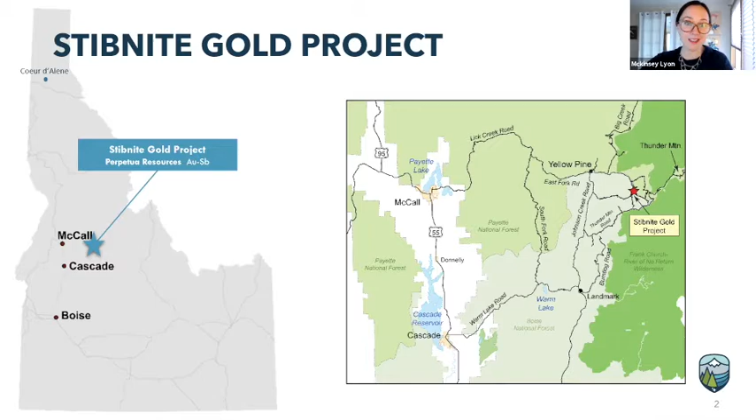As we start the conversation today, it's important to also get a good sense of what Stibnite is today. This historical Stibnite mining district first saw mining activity back in 1899, right around the Thunder Mountain Gold Rush. Predominantly at that time, they were looking for gold and silver. But the majority of the mining at Stibnite actually occurred during World War II and just past the Korean War.

This is because at Stibnite they identified a really important source of both tungsten and antimony, and these were considered critical for the US war effort. So again, most of the mining happened long before there were environmental regulations on how to mine or how to leave the area when they were done. As a result, there are many legacies that have been left behind.

For example, today the East Fork, South Fork of the Salmon River flows into the abandoned Yellow Pine mining pit. As a result, this has also blocked Chinook, steelhead, and bull trout from migrating into the upper headwaters of the East Fork and Meadow Creek in order to reach spawning grounds for over 80 years.

We also have over 10.5 million tons of unlined tailings and spent ore that currently pose a risk to degrading water quality, both with arsenic and antimony. And then overall, we just have degraded habitat conditions, both from sources of sedimentation, past forest fires, etc. So this is an area that needs help.

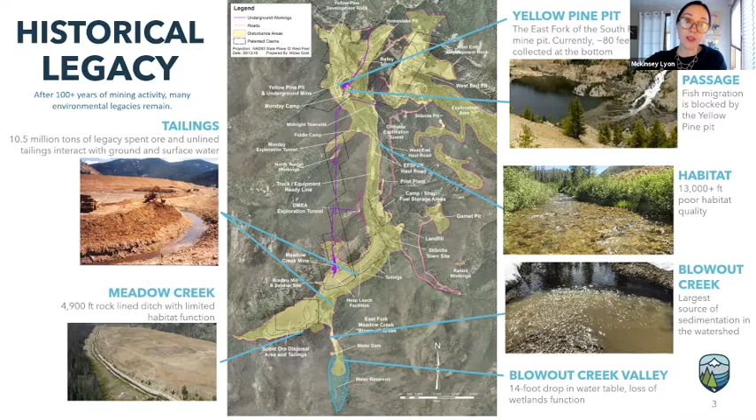However, between 2002 and 2012, the former operators and the former governmental entities involved signed a series of consent decrees. And these decrees allowed these parties to walk away from any future responsibility over the environmental conditions that have been left behind here at Stibnite.

So knowing this about Stibnite, we knew that if responsible modern mineral development was going to happen here, it had to bring along environmental solutions. That's why we've designed this project to repair the legacies of the past, to leave Stibnite better than it is today, and in doing so, also produce the minerals and metals that we need for our country, both gold and the critical mineral antimony.

So we spent 6 years gathering data, listening to our communities, and putting together a plan for the Stibnite Gold Project that we call the Plan of Restoration and Operations. That was then delivered to the U.S. Forest Service over 4 years ago, which initiated regulatory review of the project under the National Environmental Policy Act, or NEPA. This regulatory review includes a whole number of local, state, and federal agencies.

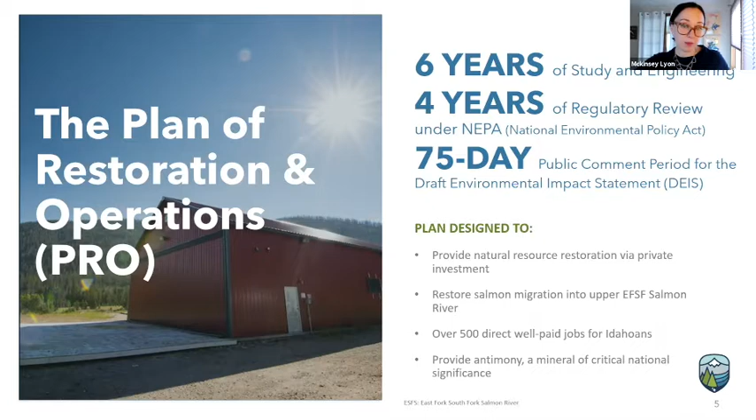It also recently included a 75-day public comment period on the draft environmental impact statement. Now, some of the things that this draft environmental impact statement concluded supported our approach with the project.

By looking to restore the legacy aspects of the site through modern mining, we could increase stream functional units and wetland functional units. We could help support fish populations by providing more access to critical habitat. We can improve water quality, and overall help restore components of the site.

But it's also important to note that the draft EIS is a draft for a reason. It's intended through the NEPA process to help the public get eyes on a proposal and provide comments and feedback. Through that 75-day comment period, there were just over or under 10,000 comments received. While the majority were supportive of the concept and the project, there were still some we wanted to pay close attention to because they brought forward concepts and ideas that can make the project better. Through that process, reading the draft EIS and the comments, we've identified opportunities to improve water quality, reduce stream temperature, and overall reduce the footprint of the project.

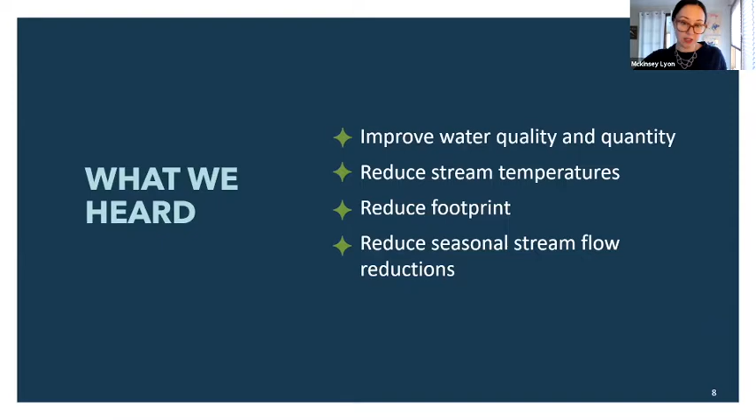So, for example, we've now proposed to the U.S. Forest Service, in response to comments on the draft, an overall 10% reduction in total volume of mined material, that we would reduce the size of the Hangar Flats pit by 70% and fully backfill it, and we would also eliminate the need for what we call the Fiddle waste rock area. By doing this, we also see a substantial reduction in our overall footprint for the mine.

Some of the added benefits these elements bring are improved water quality, overall reduced water temperature back to levels more closely aligned with baseline, and a reduced footprint, which were all goals we went into. Ultimately, this is how the NEPA process is designed to work, to take in feedback and continually be iterative, to ensure that by the time we get to the final environmental impact statement, we have a project that has truly been refined and is the best for Idaho.

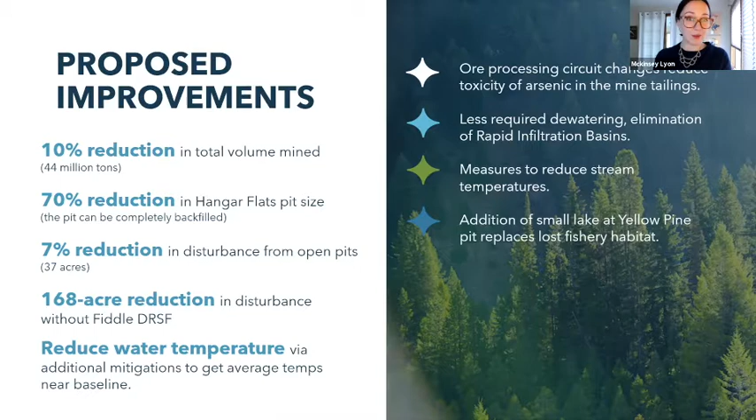So with that overview on where we are, I want to turn it over to Rob to talk about some of the conditions of the site today and how we've approached the project design.

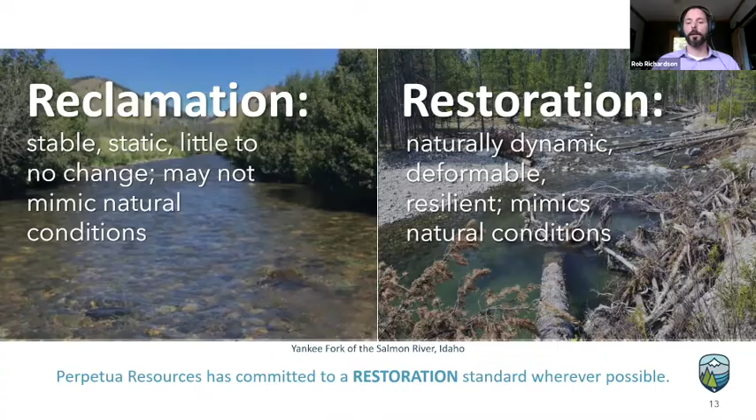That reference site data can then be used to develop empirical formulae that help fill in gaps between some of the data points, and we use published design guidelines, of which there are many. Those three things combined provide multiple lines of evidence for us to develop the physical design criteria for the project—essentially making sure the stream will function physically by transporting sediment, water, and nutrients, and not excessively eroding its banks or bed or filling in with sediment. But of course, we have aquatic organisms as well.

Within the constraints of what's physically appropriate, we also try to optimize the stream for biological conditions. We've worked with fisheries biologists to understand preferred habitat conditions for sensitive and keystone species such as Chinook salmon, steelhead, bull trout, and cutthroat trout. We've incorporated, to the extent geomorphically appropriate or feasible, those biological criteria into the physical design, refining it to best provide conditions that will improve habitat for those sensitive species and life stages.

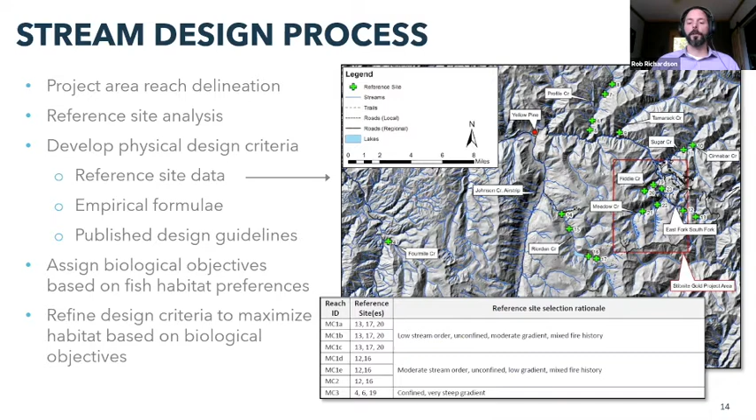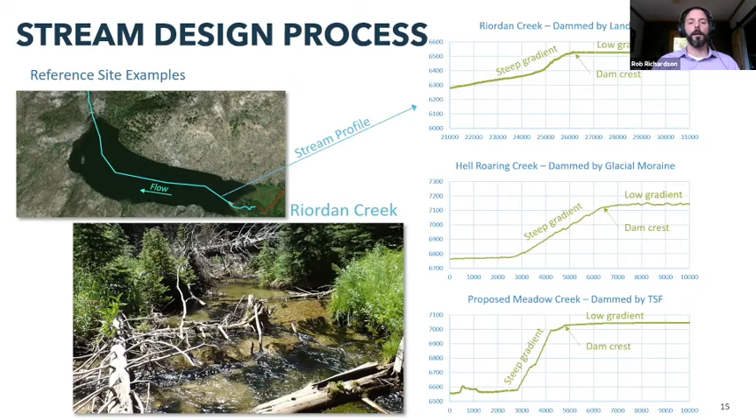That's similar to what's proposed at the tailings facility for the Stibnite project—a dam with a low gradient reach upstream and a steep gradient down the face. So we were able to collect valuable data in both the low gradient and steep gradient segments of this reference reach.

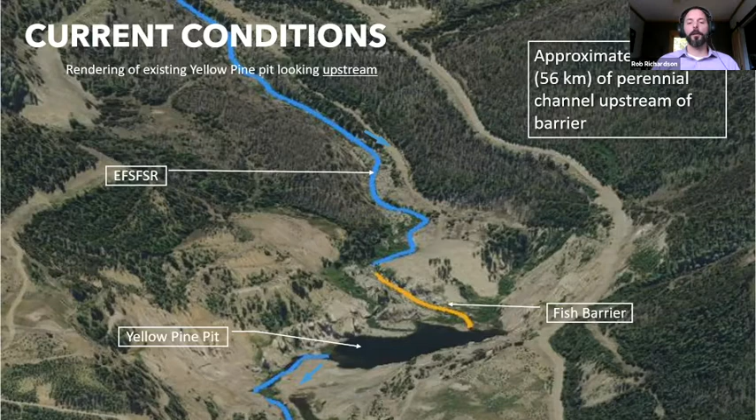One of the other key features to be restored is fish passage at the Yellow Pine Pit, as Mackenzie mentioned. This is an oblique aerial looking upstream, showing the east fork of the south fork of the Salmon—I'll just refer to it as the east fork—flowing toward us, then down a cascade into the existing Yellow Pine Pit and on downstream. That barrier currently blocks about 35 miles, or 56 kilometers, of perennial stream upstream of that point. There are different fish access attributes that Eileen will touch on as the next presenter, but I wanted to point out how much perennial stream is blocked by that current barrier.

After mining is complete, approximately 10 years later, the Yellow Pine Pit would be backfilled and the stream restored back over the top with natural passage up and down, and the mine tunnel would be abandoned.

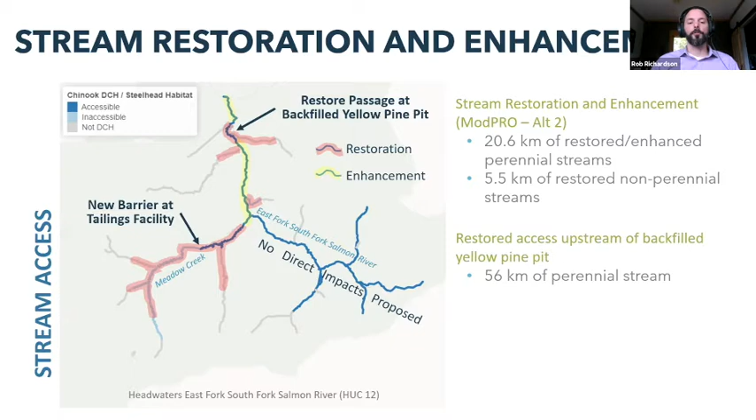Next—that area of the Upper East Fork looks like this.

There's a portion that had been burned in the past, and some of those trees are now starting to fall in and provide a lot of cover and structure for the channel, sorting gravels, creating pools, generally pretty good habitat.

Likewise, you go upstream just a little bit further and you get into a spruce fir dominated forest with a number of floodplain wetlands. You have a nice sinuous channel with vertical to undercut banks, gravel bed, pools, large wood. Again, also generally pretty good habitat.

So there's a combination of existing high quality habitat and proposed enhanced and restored habitat upstream of the existing Yellow Pine Pit.

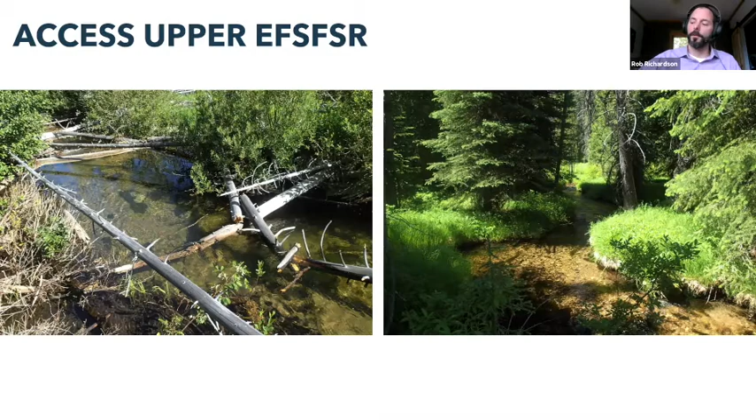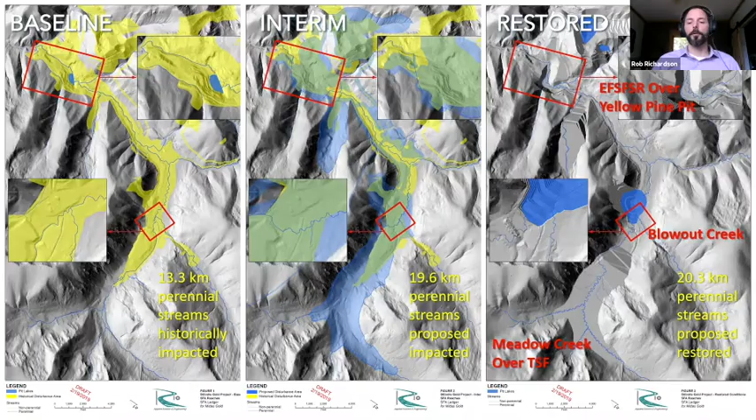So when the Yellow Pine Pit is further mined, that will then be backfilled. That's what's shown here in orange, the backfill of the Yellow Pine Pit, as you can see on the right. Additionally, we're going to create a new floodplain.

You can see that floodplain's on the order of 200 to 500 feet wide or greater in some places, shown in green, and the East Fork restored through the middle of that.

Now, the floodplain, we worked with the Stibnite mine plan team to create a sinuous floodplain, that S shape, rather than a straight line. If it were straight, the stream gradient would end up around 6.5%. By creating the sinuous floodplain, we can get a stream gradient on the order of 4.5%, which is a little easier for those fish to move upstream through.

Likewise, those two curves in the floodplain coincide with Midnight Creek coming in from the right, shown as MNC, and Hennessy Creek coming in from the left, or HC. Those two streams are both perennial cold water streams, but they're relatively small and currently don't have any fish use or fish access.

But by allowing those streams to flow down along the downstream margin of each of those bends in the floodplain, we can create what's called a wall-based channel, where flood flows from the East Fork, as depicted by those light blue dashed lines, would periodically add flow and volume to those small tributaries, scouring pools, moving sediment, and creating habitat.

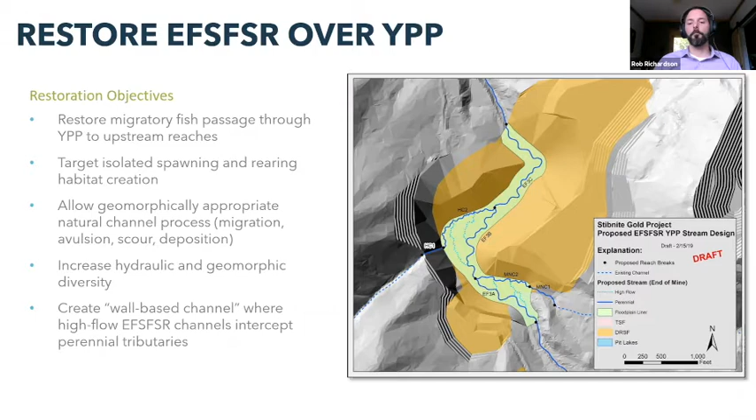Okay, next. Another example is the Meadow Creek over the tailings facility.

You can see there's a proposed dam, upstream of which, or to the left of, would be tailings, and downstream a large development rock buttress to help stabilize that dam.

And as I mentioned earlier with the reference site at Riordan Creek, you would have a very low gradient system on top of that facility with a steep drop off down the side. That would represent a barrier, but there would be an isolated population of fish upstream and enhanced and restored habitat downstream.

Now, unique to this site, as well as the restoration over Yellow Pine Pit, is that the stream and floodplain would be lined. So there would be an effort to separate the potential groundwater interchange from the stream groundwater and what lies below, in this case, the tailings facility.

But the stream liner isn't just beneath the stream, it's buried at depth beneath the entire floodplain. So here we've got about a 12-foot wide stream and about 150 to 200-foot wide floodplain, ample room for the stream to migrate around laterally and vertically, because the stream liner would be buried below the maximum anticipated scour depth and across the full width of the floodplain.

So as part of our natural channel design, the stream would be able to migrate and meander and scour pools and evolve just like a natural stream would. Additionally, we've provided, as you can see at the upstream extent, some accommodation space for alluvial fans to develop, which we would anticipate in that transition from a steep to low gradient area.

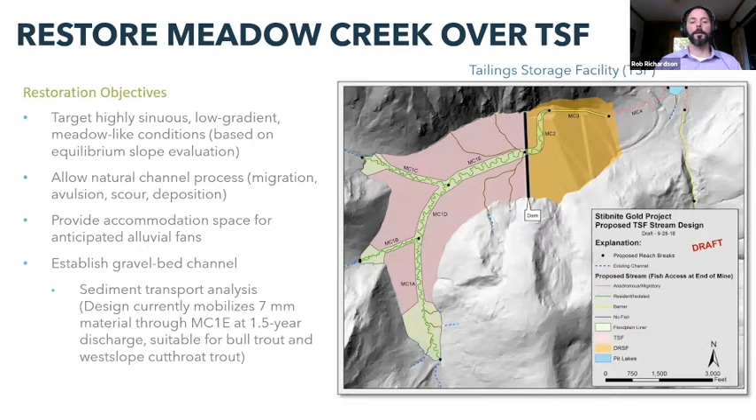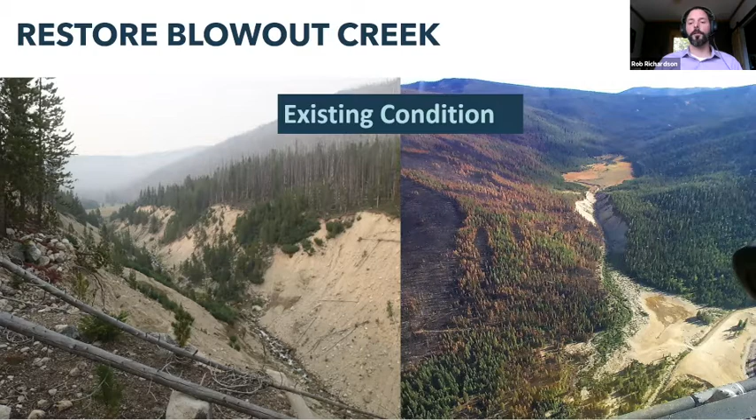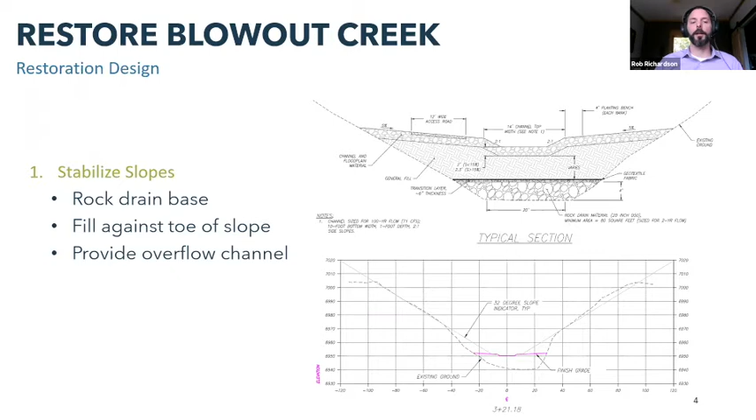There's really not fish passage up this area right now, so fish passage is not a big concern. It's a relatively steep gradient area, up to 17% gradient. So that's the fix for the sediment problem.

Upstream, that destabilization has resulted in an incision and head cut that's dried out the meadow in this area. About 16 feet of incision have occurred. We're proposing a structure near the downstream end of that meadow that would provide grade control and function similar to a large beaver dam, backing water up into that area, allowing it to slowly fill again with sediment, but also reestablishing the groundwater levels that would provide the hydrology for the wetland.

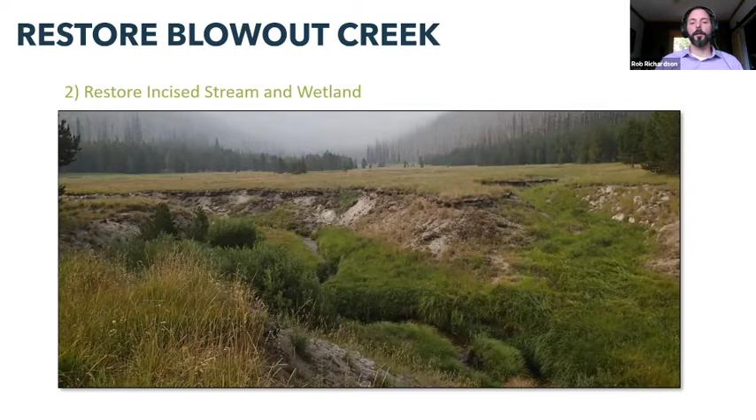So how are we going to evaluate our goal, our objective of trying to restore these streams to a condition better than what they are today? We're doing that through a stream functional assessment.

The functional assessment we've developed is based on the U.S. Forest Service watershed conditions indicators, which are listed here. Each of these indicators has been evaluated at a number of sites throughout the project area to determine what the existing or baseline condition is. Then we estimate the future condition for each of these based on models, based on our stream design, based on proposed impacts from the project, and calculate what those would be for each of the reaches that are part of the project, for each year of the mine.

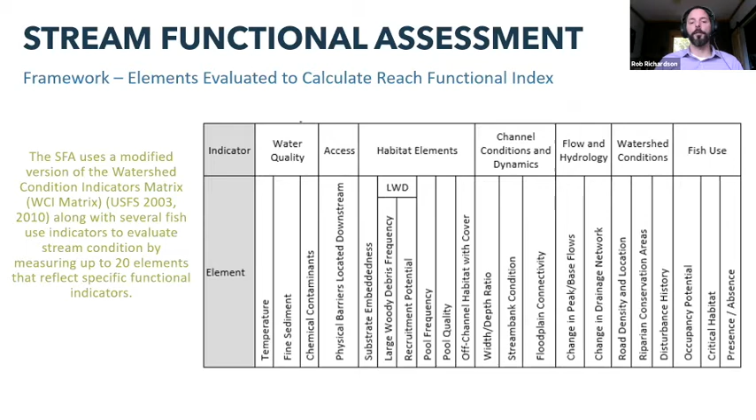We tabulate all of those data in this stream functional assessment following this simple equation. Essentially, all of those watershed condition indicator elements are tabulated and normalized as a percentage, so we have a percent functional index, the quality, and that's multiplied by the quantity.

My 6-year-old. So then, Olive, I'm giving a presentation, honey. Bye.

The length of the stream and the stream order is therefore provided as the quantity. So we have quality and quantity that are multiplied together to create what we call a functional unit. Those functional units are tabulated for each of the stream reaches, and all of those are then added together to provide the next slide.

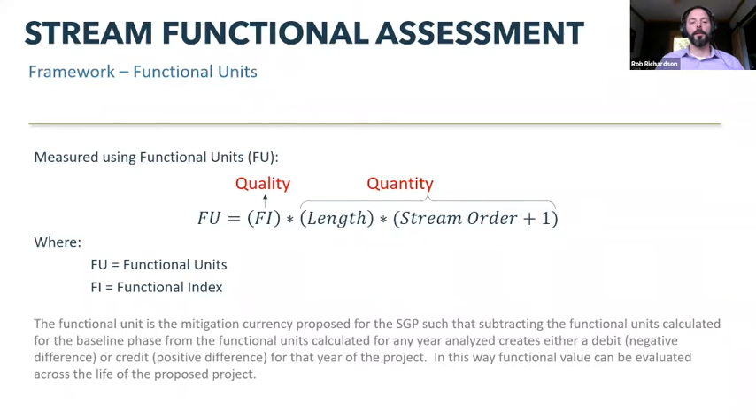What you can see is the outcome. We do this for every reach and every year of the proposed mine life. The years are along the bottom. The baseline condition is shown as the dashed line at 0 across the middle of the graph. All of the impacts are shown in orange, accumulating a deficit, and all of the proposed restoration or mitigation efforts are shown in green. The net difference is the blue line in the middle.

So you can see there are a number of early impacts and early restoration efforts, including passage at Yellow Pine Pit, restoration of Blowout Creek, enhancements at the East Fork, but they don't fully overcome the impacts initially. Over time, more and more restoration efforts start to offset the impacts and ultimately result in a surplus, which is our validation that the restoration effort is offsetting and resulting in a condition better than where we started.

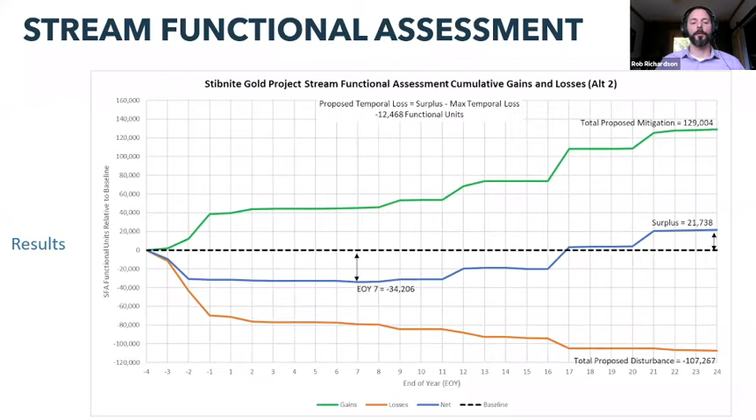And all of that, of course, is to help provide habitat for fish, which is the next part of the presentation.

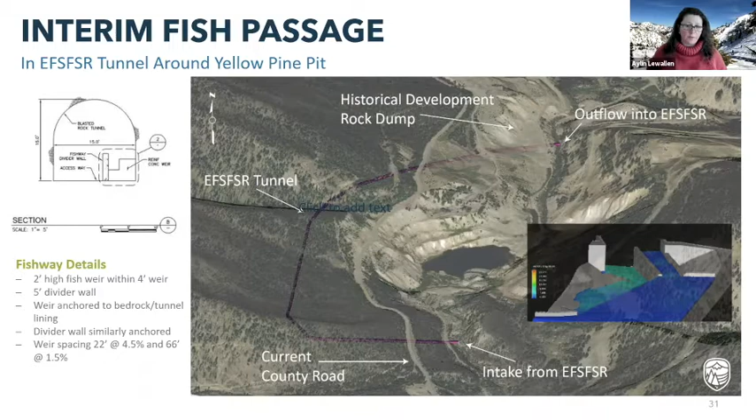So the first thing I wanted to talk about is accessibility and how that relates to designated critical habitat for both Chinook salmon and bull trout. It's also beneficial to make the point that this is all applicable to steelhead as well.

Critical habitat was not mapped above the YPP as designated critical habitat, but the habitat is suitable for steelhead. So this applies to all three of those species, as well as cutthroat trout. Currently, designated critical habitat upstream of the YPP is inaccessible — the fish species cannot go above the lake shown here in this picture.

The DEIS did not take into account the change in accessibility of this critical habitat above the YPP in the East Fork, Meadow Creek, and other tributaries in the watersheds above the YPP. When the East Fork Tunnel Fishway is operational at what's called the end of year negative-1, designated critical habitat for both Chinook salmon and bull trout will become accessible to these species, and similar improvements will occur for steelhead as well.

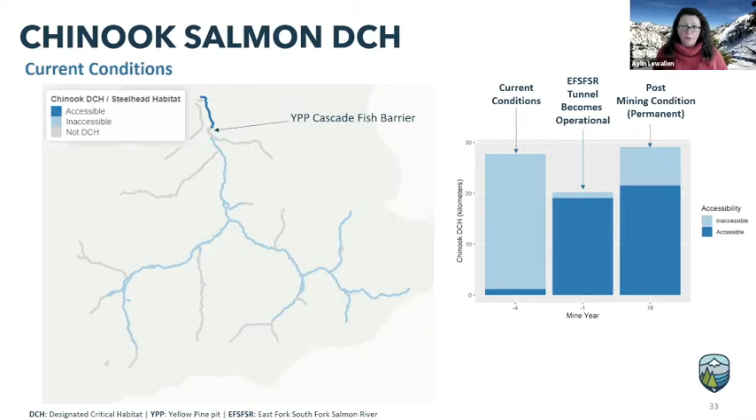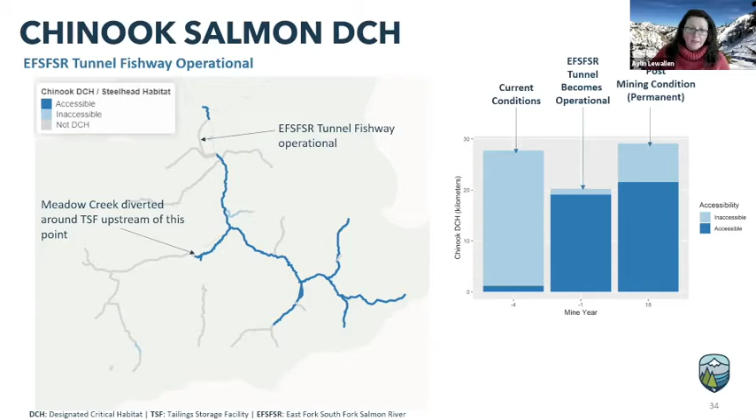The graph to the right shows the dark blue as accessible habitat over time, which increases over the mine years and is again approximately 94% greater during the post-mining condition, or the new permanent condition, compared to existing conditions today.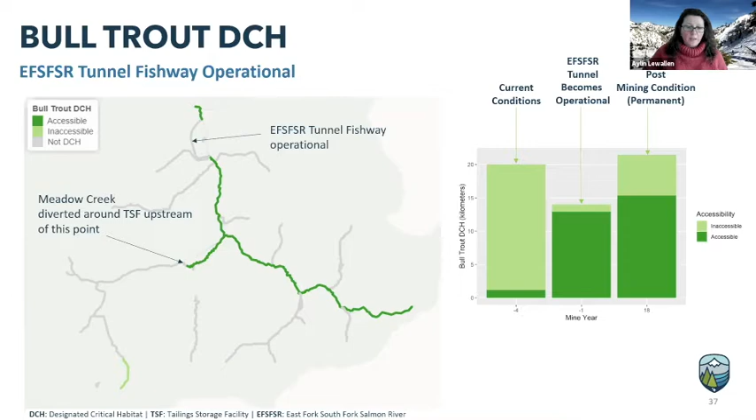Then in post-mining conditions, similar to designated critical habitat for Chinook, a more accessible habitat becomes the new normal under post-mining conditions as compared to current conditions. That's because East Fork is restored over the backfilled YPP, though some habitat remains inaccessible because of the high gradient barrier at the DRSF.

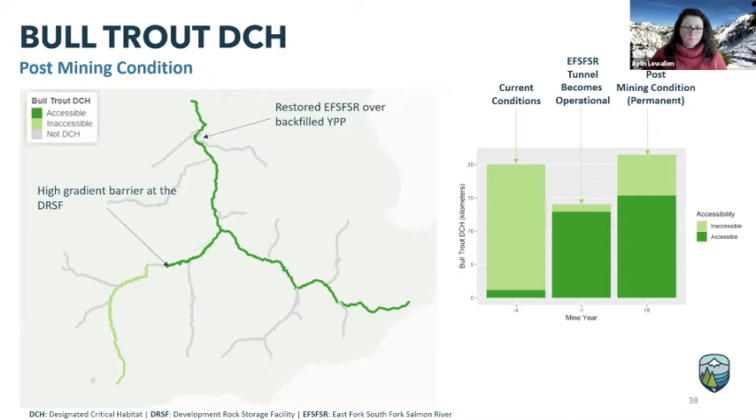So the next thing I wanted to bring up is temperature. The DEIS analysis concluded that currently, under all fish-bearing streams except for the East Fork above Meadow Creek, stream temperatures exceed bull trout weekly maximum temperature ratings of 13 degrees Celsius, which is the same as salmonid spawning daily maximum temperatures, and salmonid spawning maximum daily average temperatures of 9 degrees Celsius.

I think it's important to note that during the warmest periods of the year for stream temperature, in the summer and the fall, current conditions exceed those standards as they exist now.

The DEIS incorrectly states that modeling of alternatives shows lethal temperatures of 21 degrees Celsius at some locations, and it's unclear if this is a daily or weekly threshold. In fact, the DEIS analysis concluded that there are no reaches in any mine year, under any alternative, that have a simulated daily average temperature exceeding the threshold for lethal temperatures of 21 degrees Celsius.

Even if a more conservative comparison is made to the summer constant, considered the midpoint between the daily average and the daily maximum, only Meadow Creek exceeds this threshold, by 0.25 degrees Celsius, and only under alternative 1 for end of year 18.

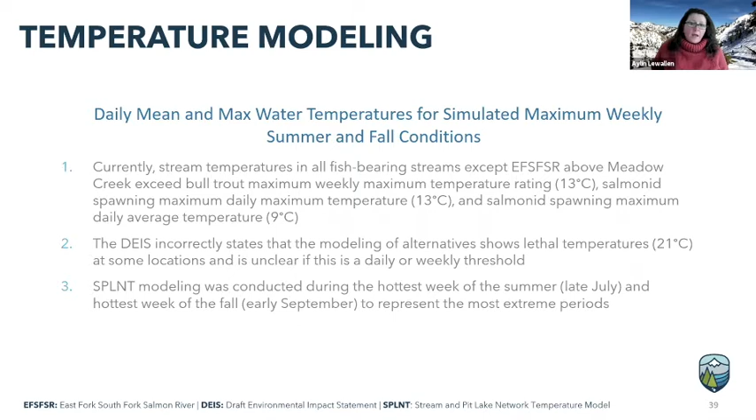Some background on how this analysis was done, which I think is important to note. The graph on the left, with the orange and yellow dots, shows maximum daily maximum or maximum daily average. So what does that really mean?

If you take stream temperature data, for example at Meadow Creek at the East Fork confluence, and take the 7 days over the week we modeled, whether the maximum summer temperature period or the maximum fall temperature period shown in the graph on the right, and take the average of the maximum temperatures, the orange dots, you get the maximum daily maximum. If you take the average of the average dots, the yellow dots, that gives you the maximum daily average mean.

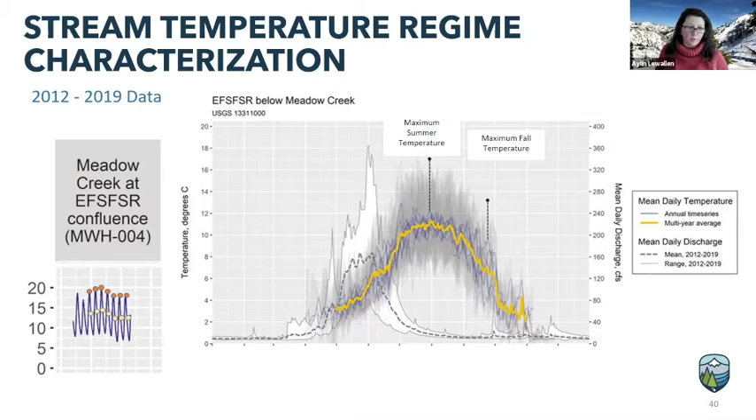That's important because we modeled the warmest week in summer and the warmest week in fall as a conservative measure, using data from 2012 to 2019 to help calibrate the model. It's worth pointing out that we modeled the worst two weeks throughout the year, so stream temperatures will always be cooler than those two weeks at any other time in that year period, based on how we did the modeling.

It's important to note the context of the life stages of the various salmonid species in these streams as it relates to these two weekly conditions, as shown in this figure for steelhead, cutthroat trout, summer Chinook, and bull trout, showing the different life stage periodicities throughout the year.

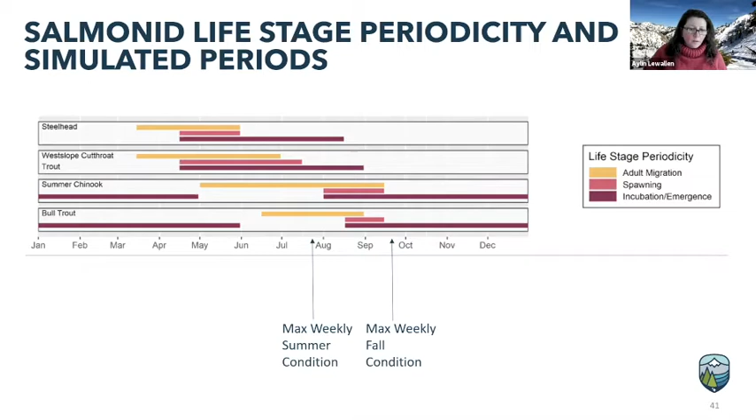In the next slide, we took the data for no action, or current condition, and showed it modeled against ModPRO, which is alternative 2, at years 6, 18, and 52, comparing those data at different fish-bearing stream locations modeled for stream temperature. As you can see, temperatures are elevated as a result of ModPRO in some locations and not others, and that differential, or delta, becomes less over time between mine years 6, 18, and 52.

After reading the DEIS and reviewing public comments, Perpetua knew that water temperatures deserved additional attention and improvements. We are currently working with state and federal agencies to refine the project and have identified potential modifications to reduce stream temperatures. These concepts include planting wider and taller riparian vegetation to provide shading and temperature reductions, and adding a widened, deepened portion of the East Fork, South Fork Salmon River.

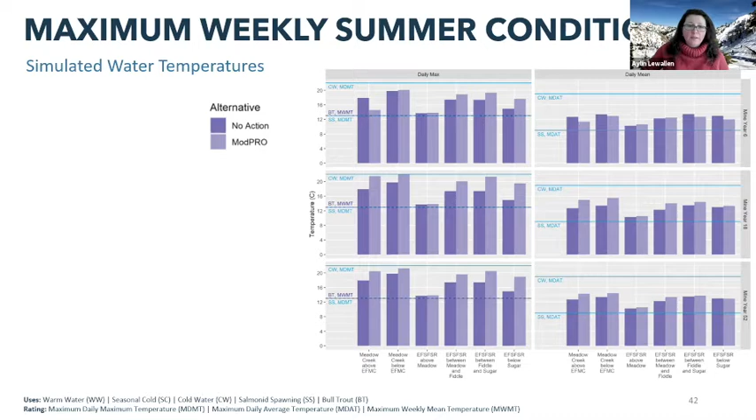Again, this is not a clearly defined answer, as a lot of this depends on habitat and whatnot. I'll reiterate that these are the two hottest maximum weekly conditions over the year, and that the salmonid species within these stream systems will not experience temperatures hotter over any other week across the year.

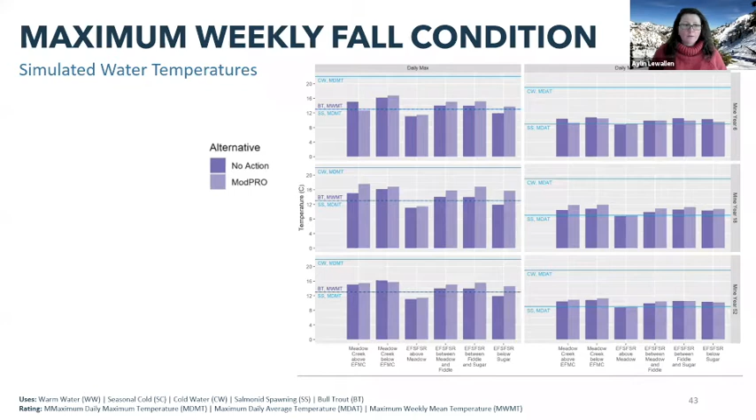So with that, I'll pass it on to Doug. Oh, I guess one more slide, sorry.

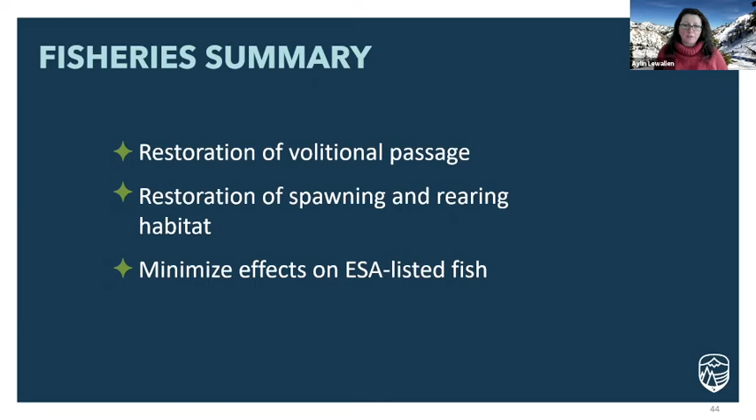Just as a summary, to point out again, the restoration of the volitional passage from the East Fork Tunnel Fishway is very important, as shown through the series of maps, that designated critical habitat and suitable habitat for all salmonid species is provided from the tunnel, and the restoration of spawning and rearing habitat. It's not just the accessibility, but the goal of restoring and enhancing habitat, as Rob mentioned, for spawning and rearing habitat for these species in mind, and in the end, to minimize the effects on the ESA listed species.

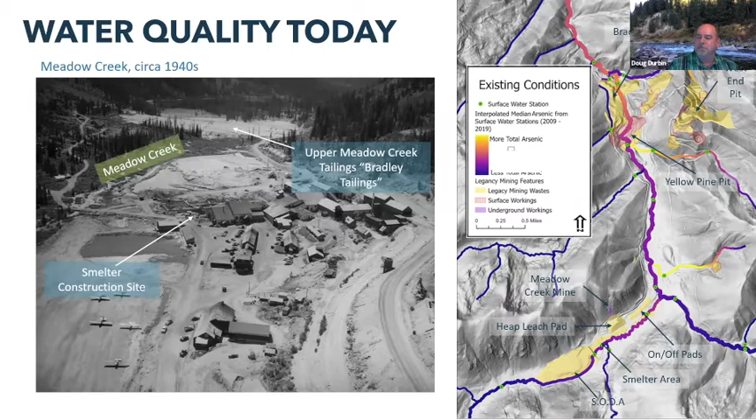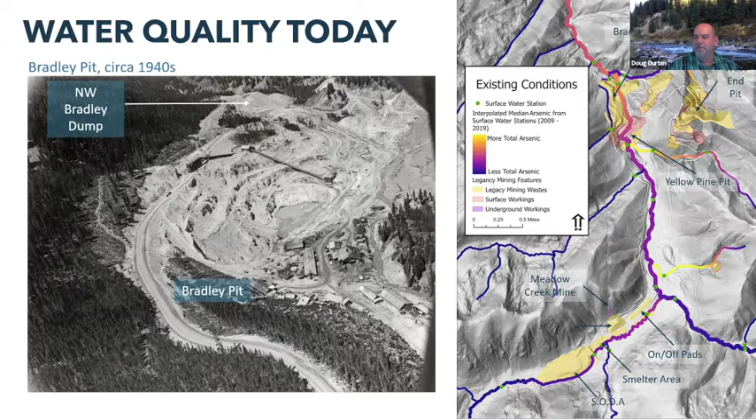This is simply another historic photo, again from the 40s. This shows the northern part or the downstream section of the site. And again, lots of activity, lots of earth moving back in those days. The graphic on the right-hand side is still the same graphic, but just shows that you've got a lot of factors historically contributing to today's water quality.

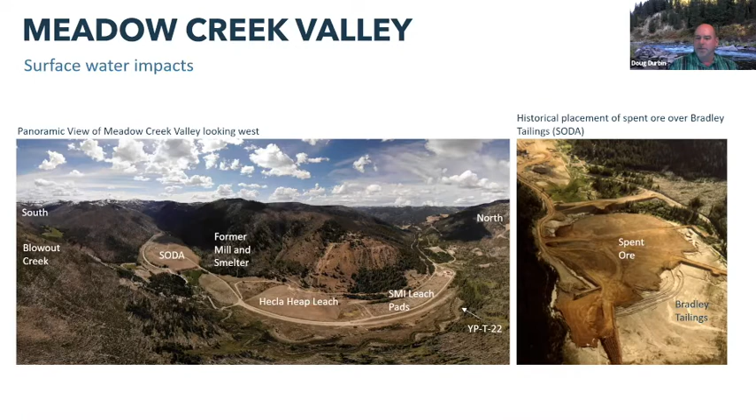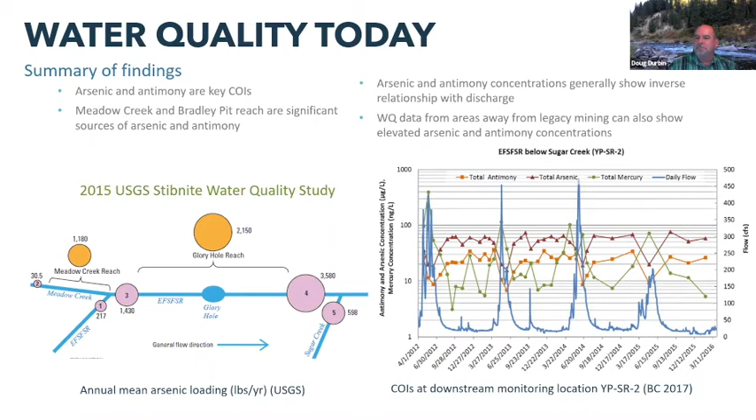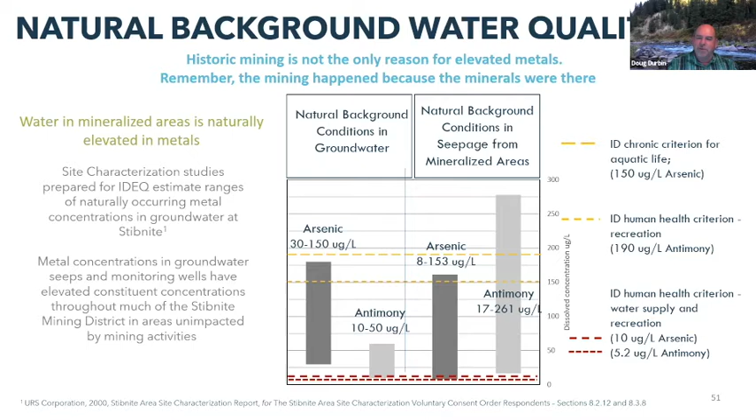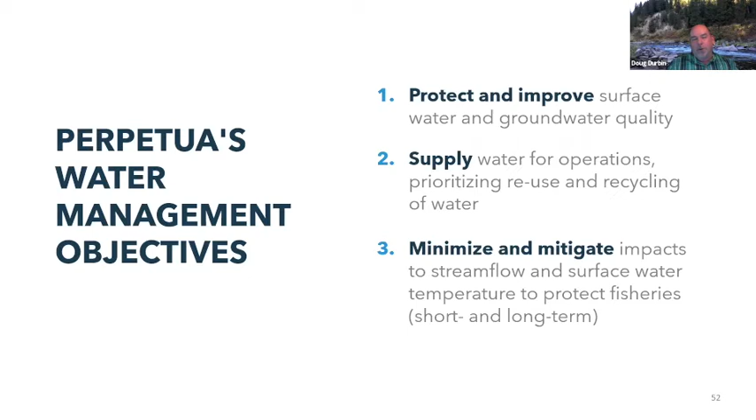But if we use water and we get that water a little bit dirty, let's use it again and again so that we keep the water we've touched inside the mine operation system. That way we only have to treat and release the water during times that there might be too much water in the overall water balance. And then finally, we want to minimize and mitigate any impacts to both stream flow on the quantity side, and to water quality, including the temperature side, as Aylin talked about for the fisheries.

So a different way of looking at that is that our holistic approach to water management is we want to avoid as many impacts to water quality as we possibly can. We do that by essentially keeping our clean water clean and then reusing our dirty water. We also want to minimize our impact as much as we can. If we have to touch water and use it in the process, then we want to make sure that we're not using more water than we need. That's where this recycling and reusing mindset comes in.

And then finally, as I mentioned before, we mitigate by making sure that we are treating water when we have to treat water. We're going to hold water in storage ponds to keep from releasing it. We're going to manage water by moving it around from one place to another to make sure that we use the water for its highest and best use in as many cases as we possibly can.

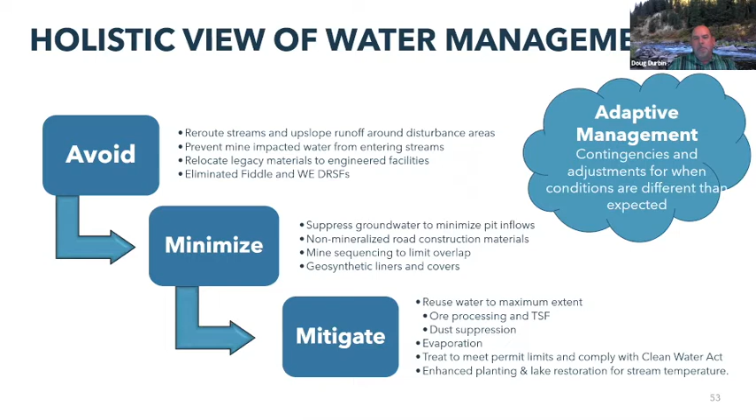And then the little cloud over at the right-hand side reminds us that adaptive management is key to any operation like this. Adaptive management means that when something in the future changes—maybe climate change, maybe simply a very wet year comes along, maybe something changes the schedule of the mine—our response is not to keep doing what we were doing. We constantly reassess where we are and we adapt to those new conditions to make sure we're still making smart choices for the environment.

So in terms of specific water management activities during construction, there will be a very serious effort to divert water around the future mine facilities so that we, again, keep that clean water clean. We'll also begin doing the early restoration and mitigation that Rob talked about. And there will be some removal and reprocessing of some of those legacy materials. Some of those piles that I showed you photos of will actually be picked up, moved, put into places where they can be better contained, or in some cases, actually run through the mine processing facility so that we can extract more of the minerals that were there before, because our technology today is more efficient and we can take out more of those minerals for beneficial uses.

During the operations period, this is when the mine is actually generating the metals that it's after. We maintain those clean water diversions. We do some dewatering to make sure that we can get equipment and people into the mine pits. That dewatering water is pulled from wells around the mine pits, and it's actually used in the process—it's a very important part of the water supply. MIW stands for mine impacted water. We manage and treat the water that we touch to make sure that it's used as much as possible within the process loop, as opposed to having to require treatment and release.

And then finally, during reclamation and closure, we continue to manage that mine impacted water for as long as there are exposed mine surfaces out there. The tailings storage facility is a major feature—that's where all of the leftover rock pieces go, very fine material goes into the TSF, so it has a lot of entrained water in it. We manage that water very carefully. Some of that can be evaporated where it goes out as clean water.

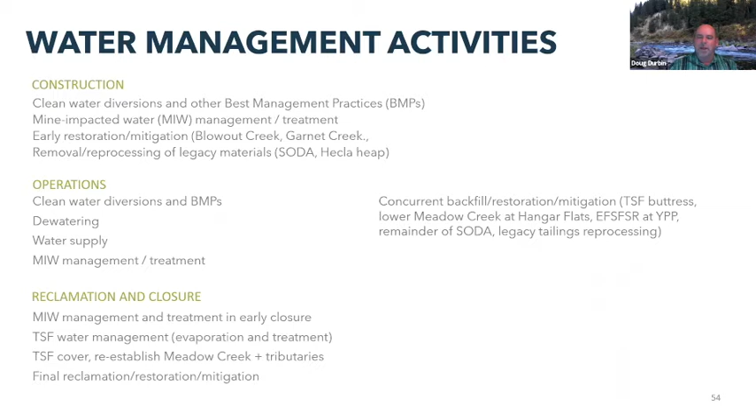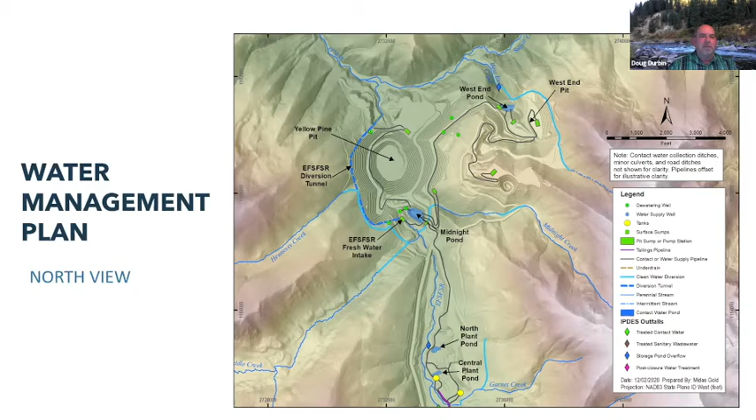So here's a couple of graphics on the water management plan. The light blue lines show the extent of the diversions, and you can see there will actually be miles of channels created simply to carry water around the outsides of the mine facilities so that we don't get clean rainwater or clean runoff into the mine facilities where it could pick up contaminants. We keep the clean water clean, minimize the amount of water we touch, and do very specific water diversion as part of that.

The next graphic is a view to the south, again where the tailing storage facility is. You can see several miles of diversions of clean water around the facility, and some ponds. The blue polygons are contact water ponds, that's the mine impacted water, collected in those locations so we can manage it and get it clean if we have to discharge it, but more than likely we just hold it until the mine can use it in its process.

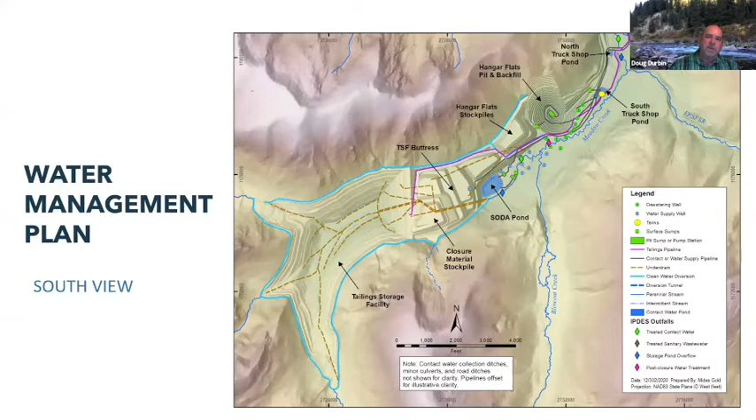Remember there are very distinct regulatory mechanisms in place, so this isn't a self-reporting or honor system kind of thing. There are actually permits and approvals that will be issued. There will be an IPDES permit issued by the state of Idaho, with very specific permit limits, monitoring requirements, and ramifications if there are problems that require attention. That's a very key part of the regulatory piece.

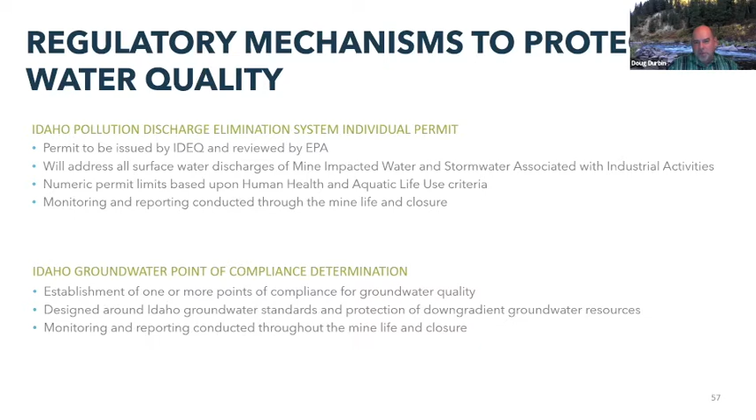Idaho also will do what's called a groundwater point of compliance. They determine locations on the site where groundwater is expected to meet particular conditions. So between those two different approvals, you have protection of surface water and protection of groundwater, documents that are overseen on a continuous basis by the state of Idaho to make sure we're doing what we intend to do.

Water treatment is a key piece here. Our team has looked at a series of different technologies to pick the ones with the best track record for settings like this. We're not reinventing the wheel; we know what has worked in other locations and what hasn't. So we're designing our system to be reliable, including storage, management, moving and pumping of water, but also an active treatment system during construction and operations to make sure that if we have to discharge water, it will meet the permit limits established for the site.

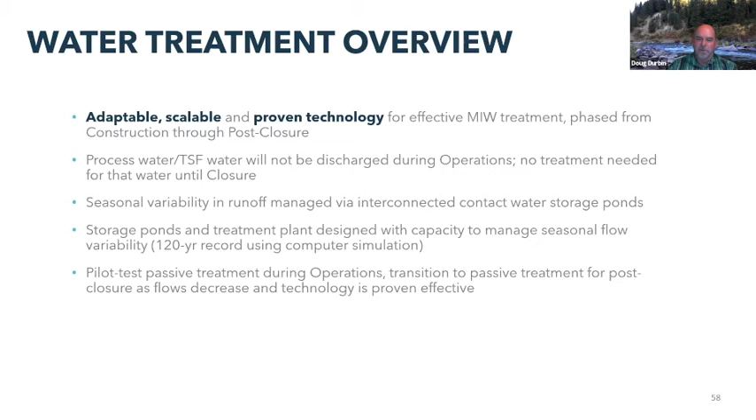The target constituents - arsenic, antimony, and mercury - we're treating primarily to remove those. When we do that, the treatment process also removes other metals. So we're being overly conservative because we treat for the big three, but we also take out other metals that might be of concern, so we get an across the board treatment of the metals.

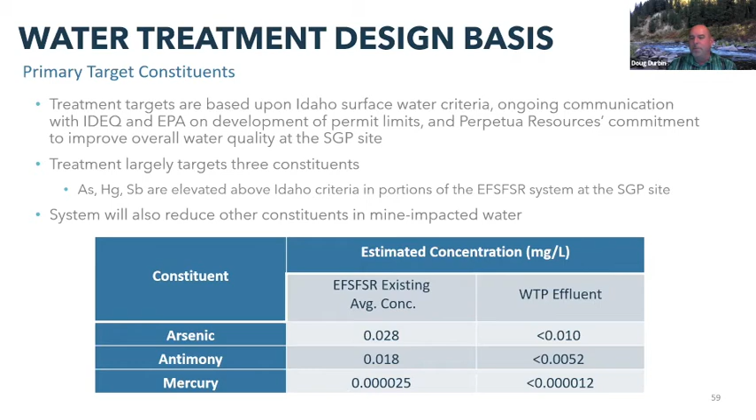Several different assessment technologies have been used to decide the best approach. There will be more than one kind of treatment through the life of the mine. Iron co-precipitation will probably be used the most heavily, at least through construction and operations, but other things like evaporation or biochemical reactor wetlands are also on the table because they can play a role in making sure we get that water clean again.

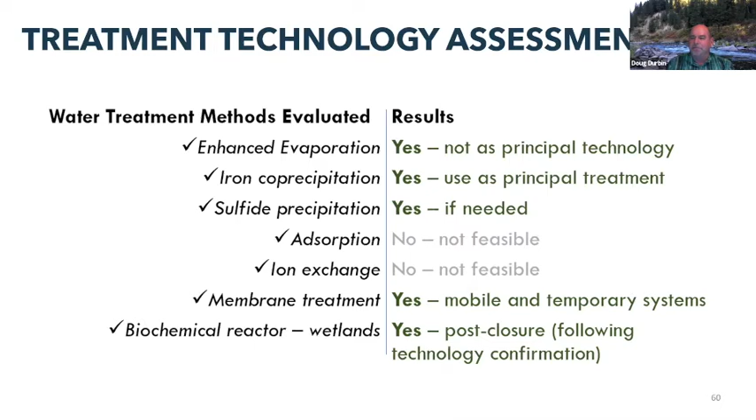One important thing to note is that Perpetua has already signed a voluntary agreement called an Administrative Settlement Agreement and Order on Consent, or ASAOC, signed with EPA and other co-signatories. This has caused Perpetua to already begin real actions to address some of the legacy materials. This means that before mining ever begins, some actions will be completed, and even if mining never happened, some actions would still be completed.

After mining begins, there may be other actions, but this is another important facet showing the commitment of Perpetua to making sure the cleanup is really happening. They're starting the cleanup before they even start earth moving for mining.

In terms of the water quality summary overall, there are legacy activities and natural mineralization that have caused problems, no doubt about that. Perpetua intends to go in and clean up and remove some of those legacy issues. The ASAOC is an upfront effort along those lines, and the mine plan includes removal and reprocessing of large amounts of additional legacy materials. The water management and treatment steps ensure that water touched during mining is handled appropriately, managed well, reused, reprocessed, recycled. And if we have to release water, it will be treated to adhere to Idaho's water quality criteria and keep that overall surface water resource clean and improve it from the way it looks today.

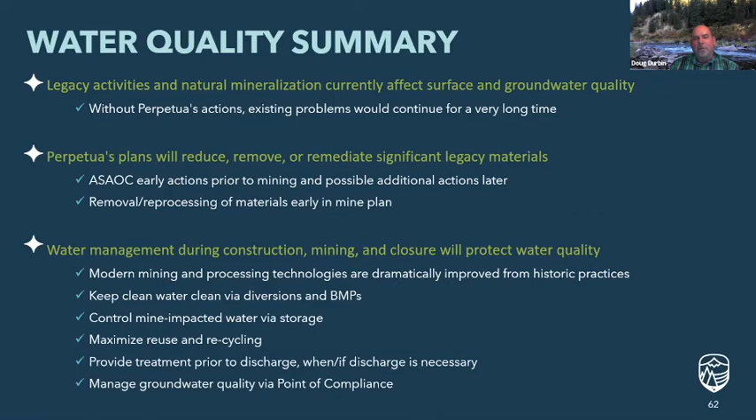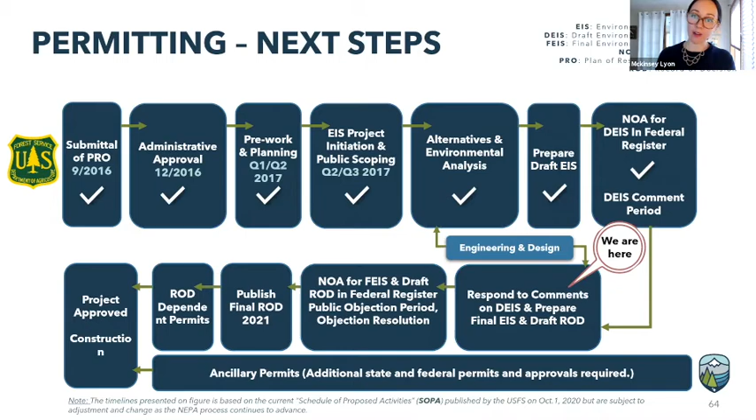Well, thanks everybody. Since we are about at the hour, I'll just go very quickly through some of the process of where we are today. As I mentioned in the beginning, the draft environmental impact statement has been published by the Forest Service, and we in the public have now had the opportunity to review those findings and submit suggestions and opportunities to help refine the project. The Forest Service is now looking through those comments and identifying what improvements can be made between the draft EIS and the final EIS.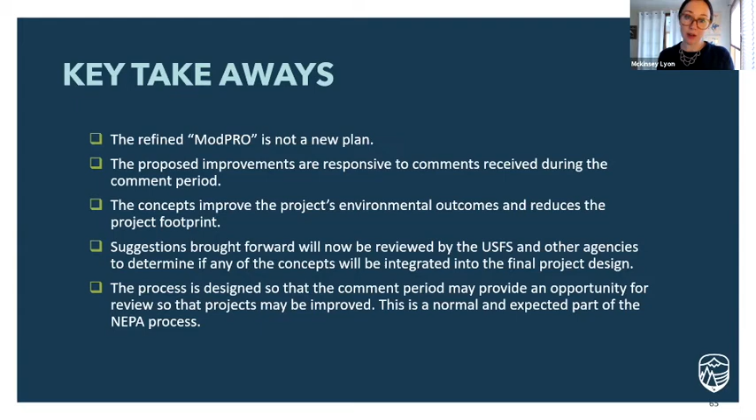That we anticipate later this year. I think the most important conclusion for us is that we've designed from the very beginning that this project can be the resource and the solution that Stibnite needs to improve water quality, to help fish once again access miles of habitat that they are currently blocked from today, and to overall see conditions improve at Stibnite.

And as we go through the NEPA process, we are listening and taking feedback very seriously, and identifying even more solutions that can be brought to the table to ensure that the project, once again, is the best project for Idaho.